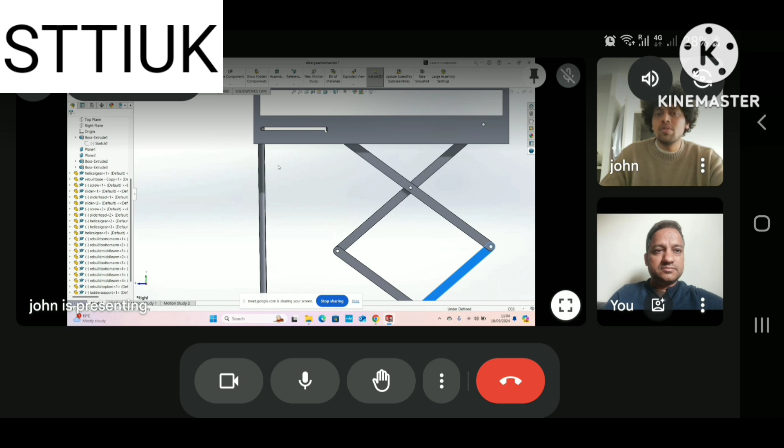Is it visible now? Yeah, your screen is visible now.

So this is what I have designed. A few changes I've made, Shivananda. Instead of a rack and pinion here, I have made a helical gear and lead screw arrangement. This is more stable.

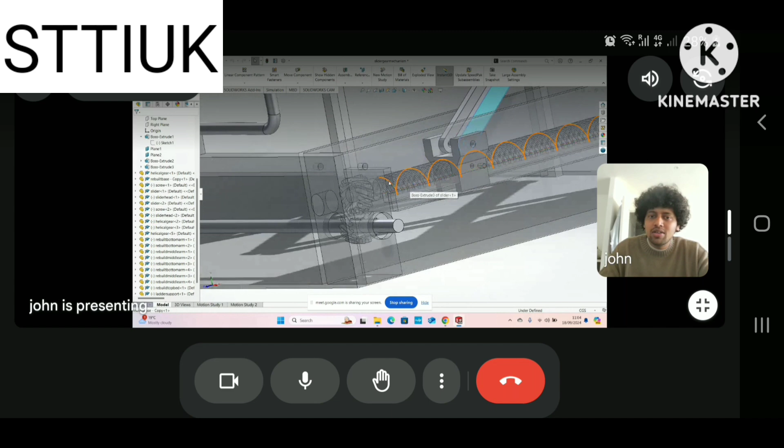Let me show you. With some kind of lever, you would be pushing it. At this end, I have left a space which is extruding outside. This can be used for connecting a lever here.

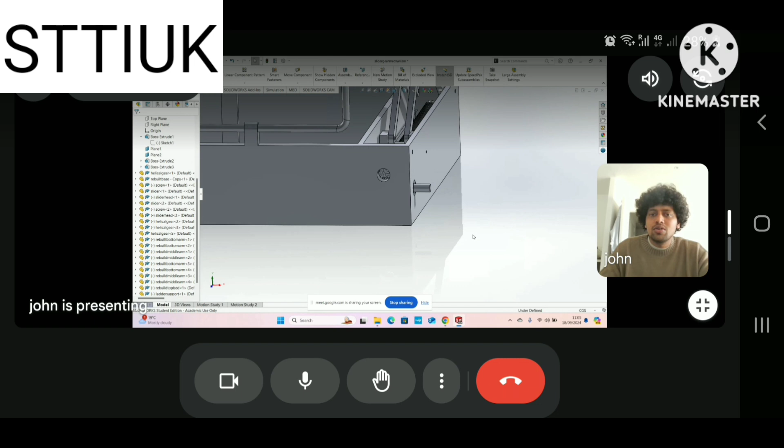This part, and inside here, a helical gear is placed vertical, parallel to this rod. And another helical gear is placed perpendicular to that, which drives the lead screw here.

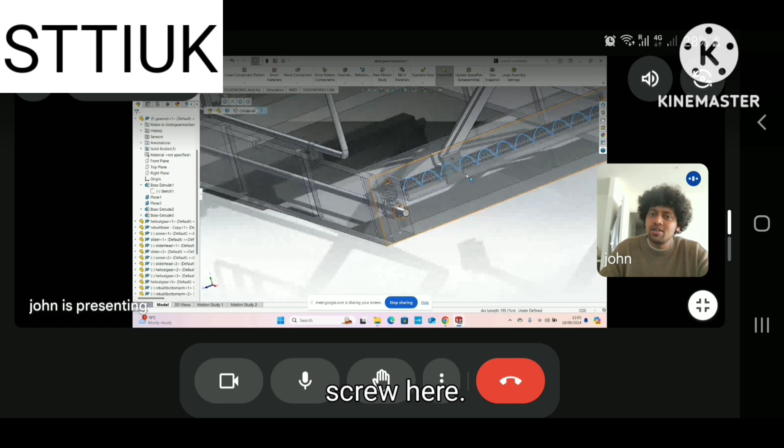It has a slider. When we rotate this, the slider actually moves from here to here. Maximum distance I've just calculated, so let's say the maximum distance is this.

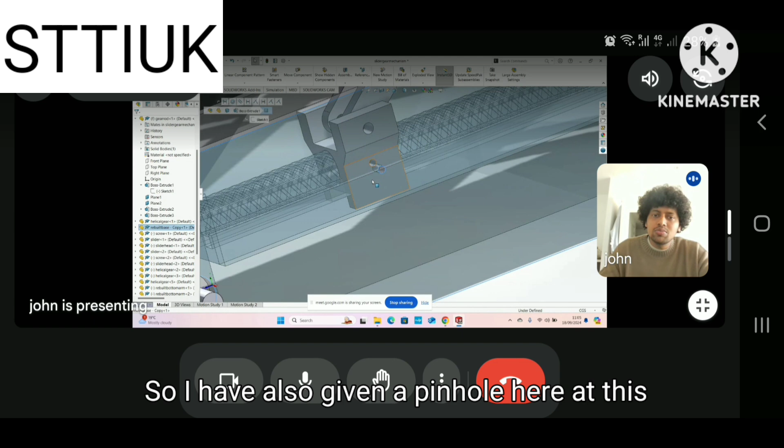I've also given a pinhole here, at this point as well as on the slider. It is not necessary since the lead screw itself will hold this, and if we turn, there is another mechanism which can hold it from turning back. But still, on the safety side, I have made another hole or a pin here.

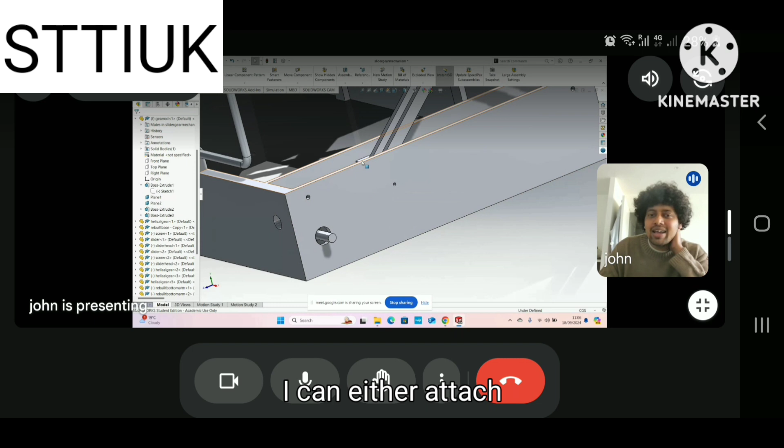We can either attach a chain or something, or plan for a mechanism where we just push in this pin, which is always attached, so that this pin goes into the slider hole here. This is one safety mechanism.

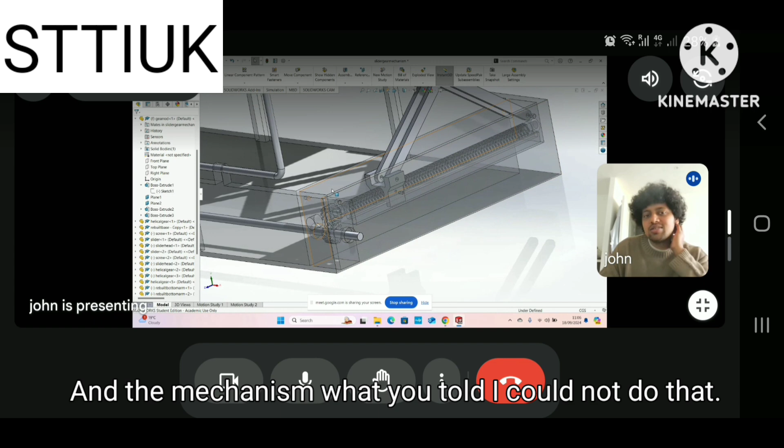And the mechanism you told me, I could not do that, so I thought of adding more. I just did a slot mechanism here, the normal slot mechanism where this slider comes and locks into this position the moment we lift it.

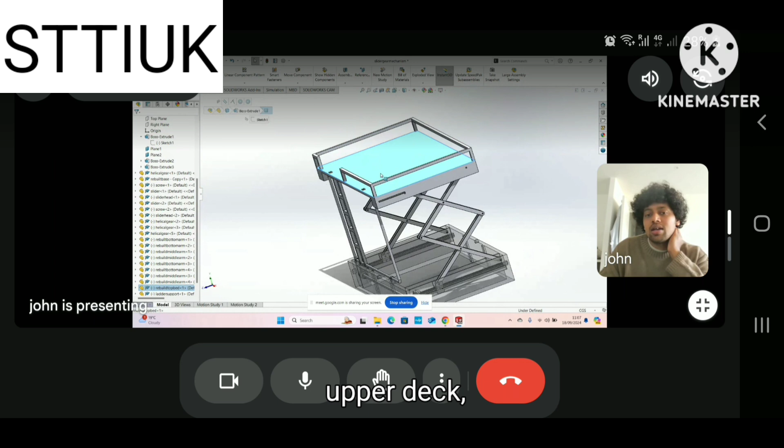So the moment someone is on the upper deck, it never goes down because this is locked here in the slot. This is one mechanism. You need to lift it up to make it slide, so we just have to lift a little and then rotate, that's it.

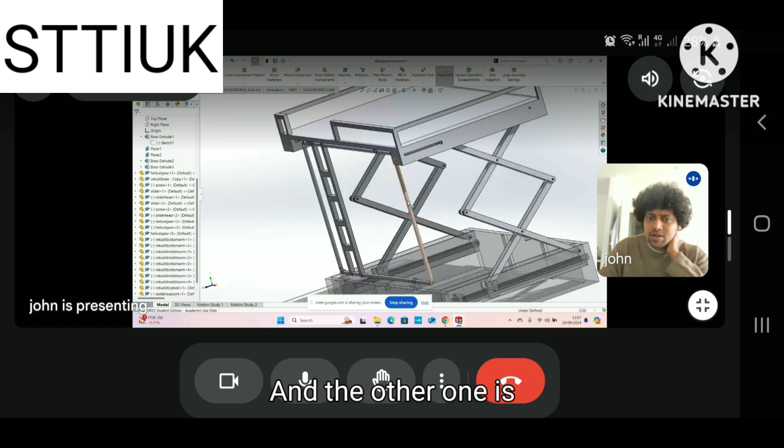Okay, and the other one is the ladder thing, which can be folded like this.

Yeah, can you hear me? Are you able to see? Yes, yes.

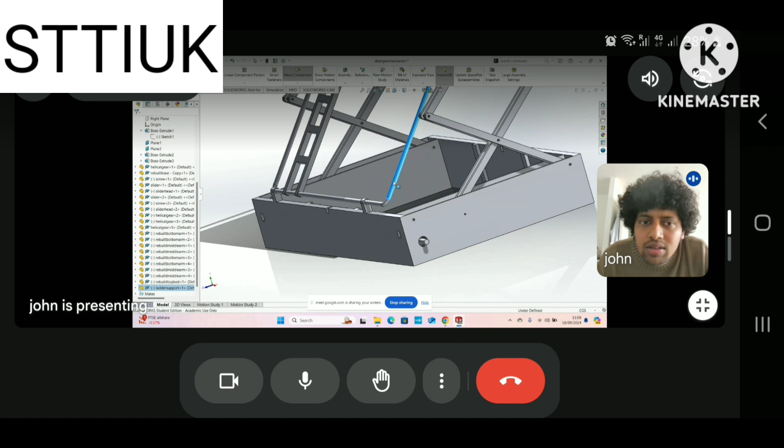So I've just given a normal... why have you made a frame? This is actually a single frame which will be attached to this point on the lower deck.

But do we need a frame like that? Only the ladder would be okay, hinged somewhere. I thought this would give more stability.

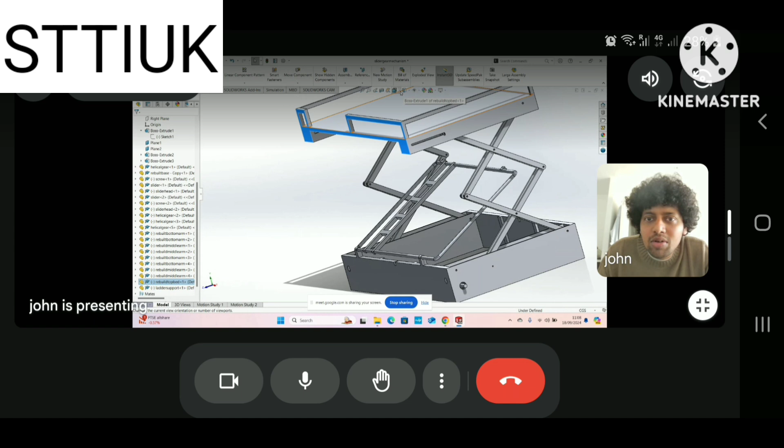In order to attach it here, let me show you. I made a slot here. This will actually move towards the left side. We just have to push it to the left side and lock it here. See, this is the distance.

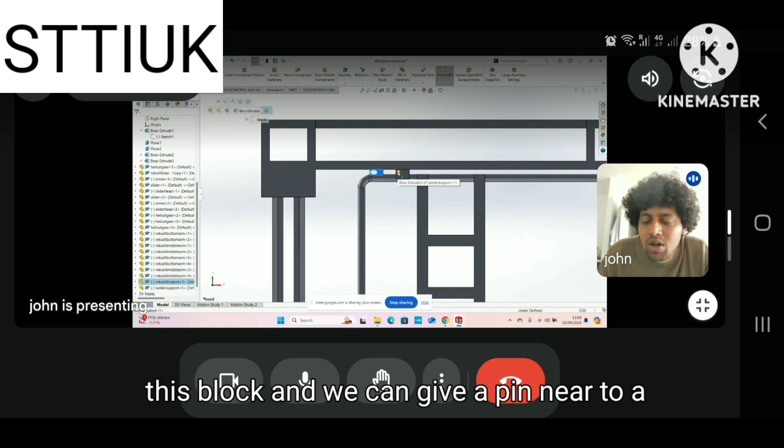Once we lift it up, we just push it towards this block, and we can give a pin here too, a pin or a screw kind of thing. We just have to push that, so it gets locked, on both sides.

No, this is good, but we need to reduce... not the weight, I mean. We need to make it a very simple mechanism. So you have made a frame like this.

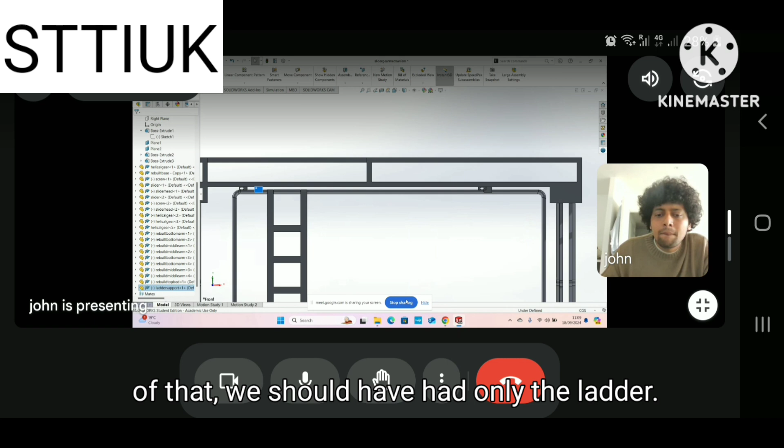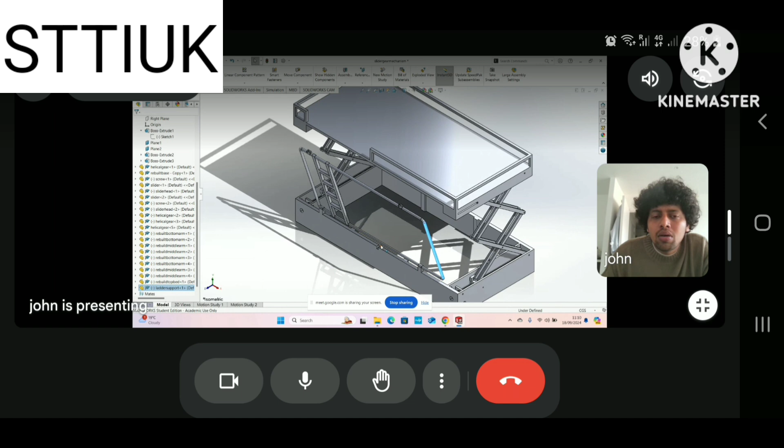Instead of that, we should have had only the ladder, in the horizontal position. Whenever we lift it, the ladder will come up and sit. We can add two ladders, on the other side and this side, so that would be a very rigid connection. But you have made it a little complex with this frame and sliding the ladder to lock into position.

All that will consume cost and material. The process cost will be more to manufacture. So a simple ladder would have sufficed in this case.

But how would we connect it? Let's say only this ladder, so how would we attach it here?

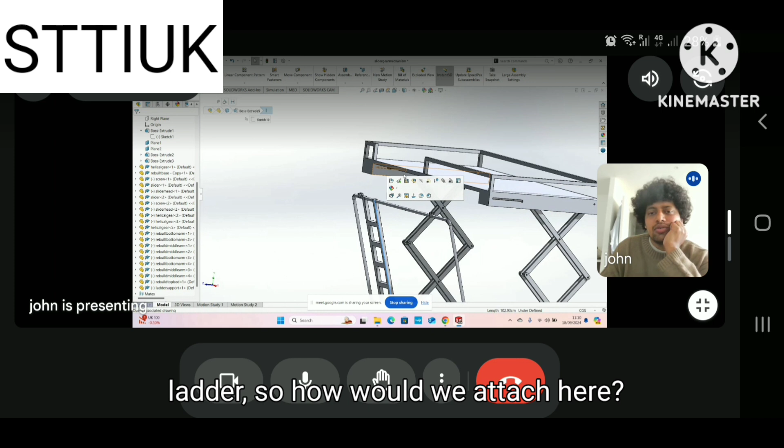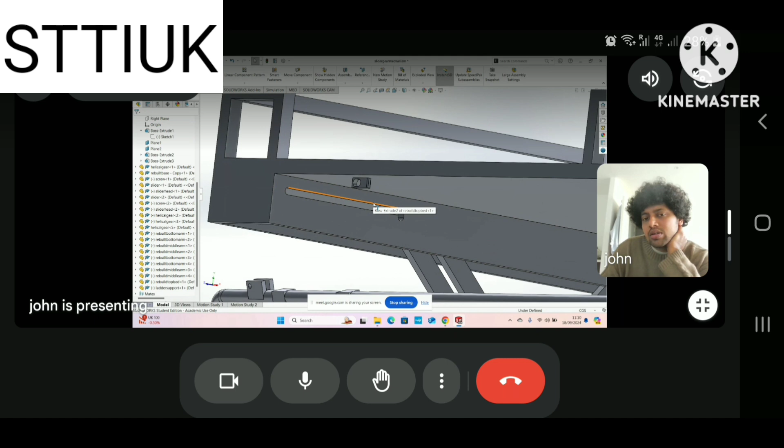I have no idea. So if there is only a ladder, the end of the ladder can be connected. Suppose on the top bed you have some hooks, so that can attach to the ladder. We can make some fixtures like that.

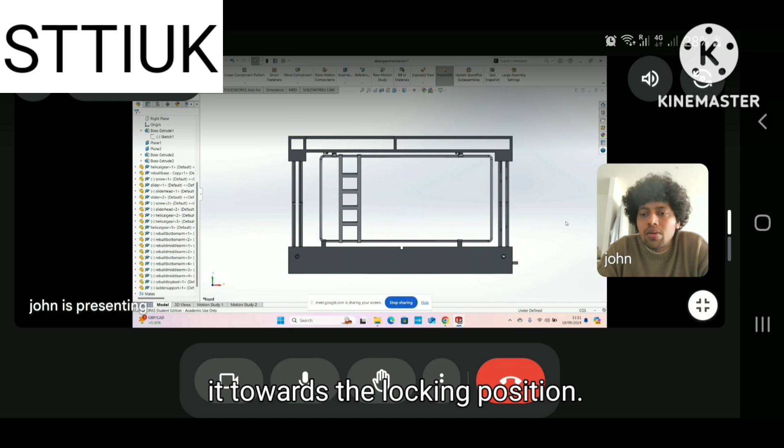We need to reduce material and make a very simple structure. Only a simple ladder would have been okay. So you are saying you have made this frame, and after lifting up you need to slide it towards the locking position. That would add material cost of making those frames and hinges, so it would make the cost go up.

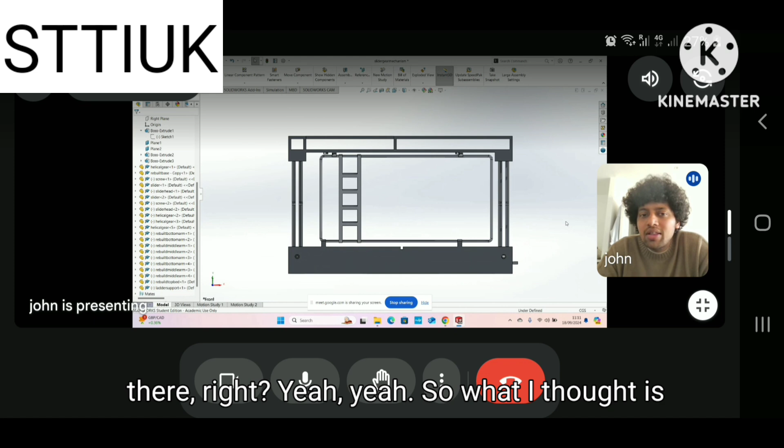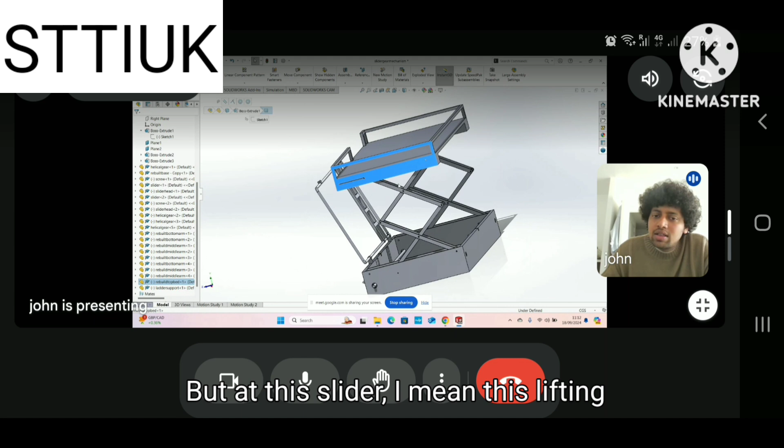Understood, but even if we put the ladder, we should actually make a hinge or a locking system there, right? Yeah. What I thought is if we have this complete frame, it will give us stability on both ends. Let's say on this side I put only one ladder, and you're saying we have to put another ladder on this side, right? Yeah, on the opposite side. But this lifting mechanism is towards this end.

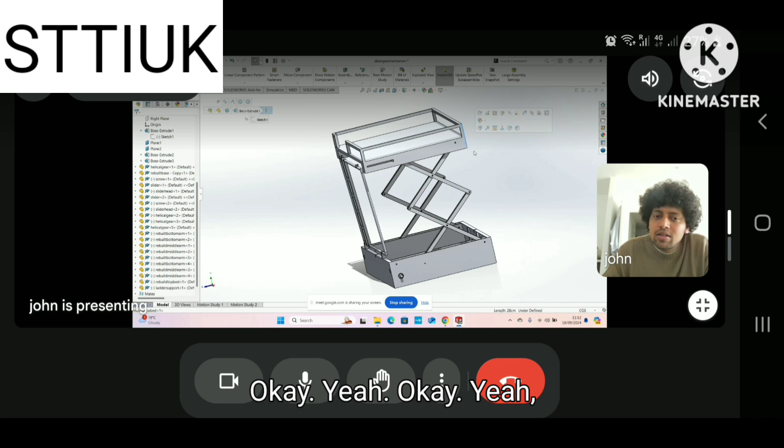So this will anyway support the other end completely. So this is moving towards this side, right? The reason I put the ladder on this side is because this side has little support compared to the other end. Okay, we can have the other ladder on the opposite side.

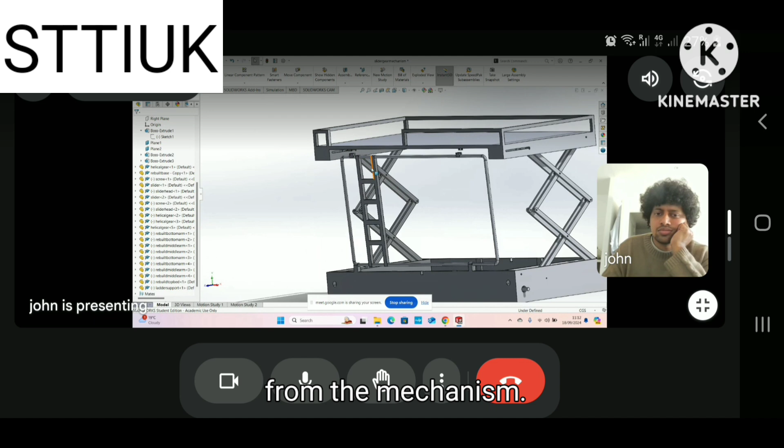We don't need a frame, just one ladder would probably be okay. So you have already provided one ladder on the other side for the overhang, more towards this side from the mechanism. Yeah, this would be okay. But generally speaking, we need lesser material and a very simple mechanism to reduce cost. That is the intention.

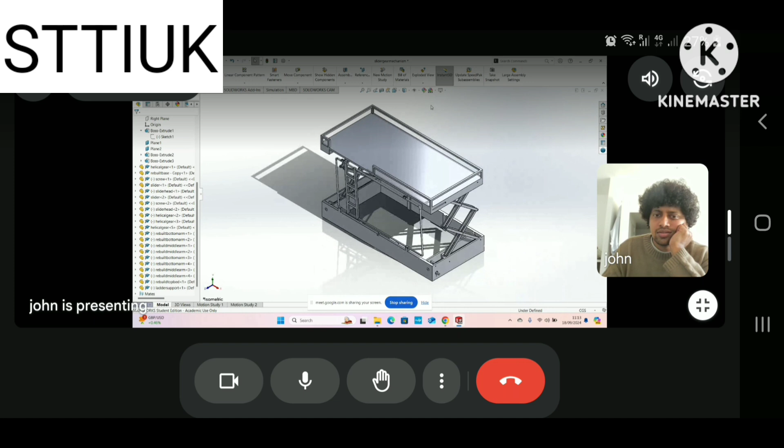But anyway, we already have this mechanism support. Do we need this much robust support, making a frame with the ladder? Do you think so? No need of this frame actually. But what I thought is since the ladder is only on this end, only at this point we have support, right?

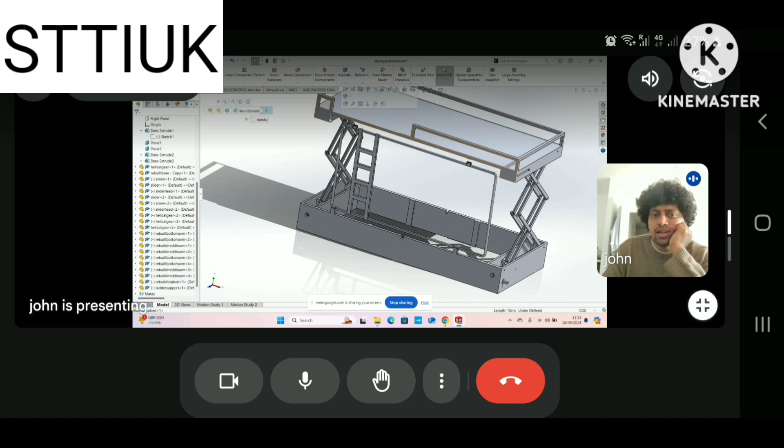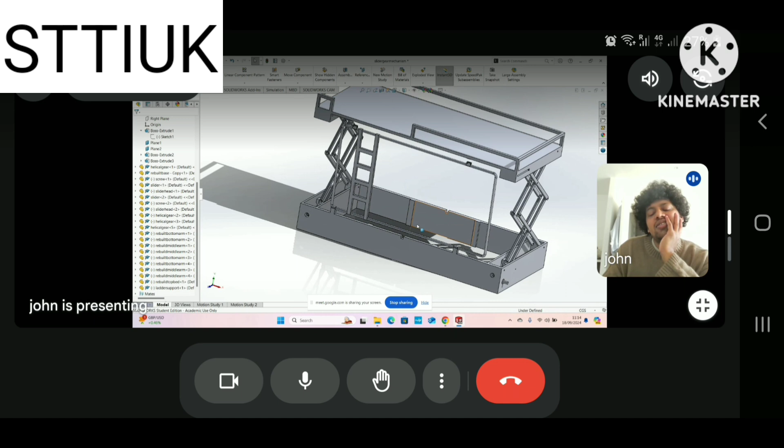On this side. Yeah, or else we need space to ingress, right? Even if you put the ladder in the middle of the bed, would that be okay? There would be good space to move. That would be okay, but for the lower deck person it would be difficult to get in and get out. It may not be that difficult, but there is some difficulty to ingress into the bed.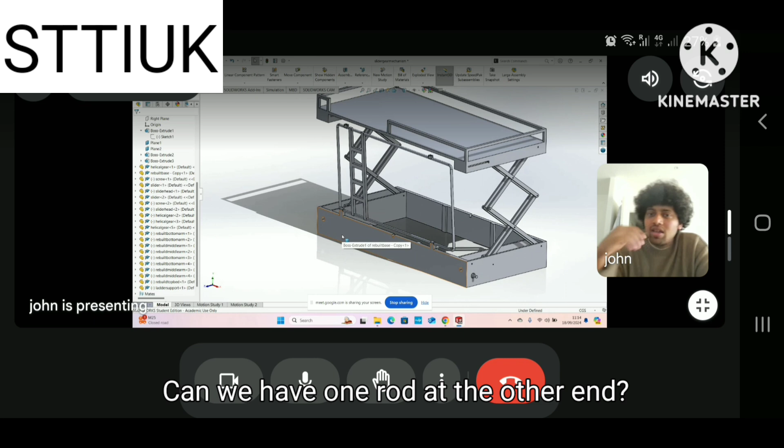So how can we make it simple, or can we have one rod at the other end? One side ladder, one side one rod would be okay. Making a big frame would cost more. So suppose you have a ladder at one end and one supporting rod at the other end, that would be okay, right? But we have to do it twice, right?

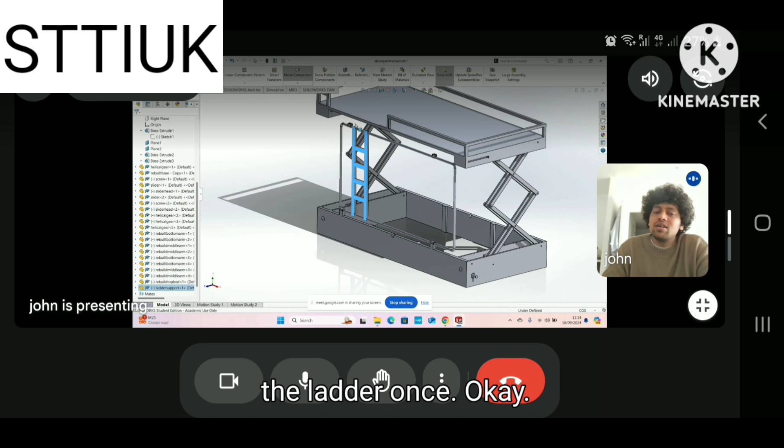So first we have to lift and fix the ladder once, then we have to again lift the rod - let's say this is the rod, the blue color. While fixing it, we have to move this again, so while moving it, this might go down. That is the problem.

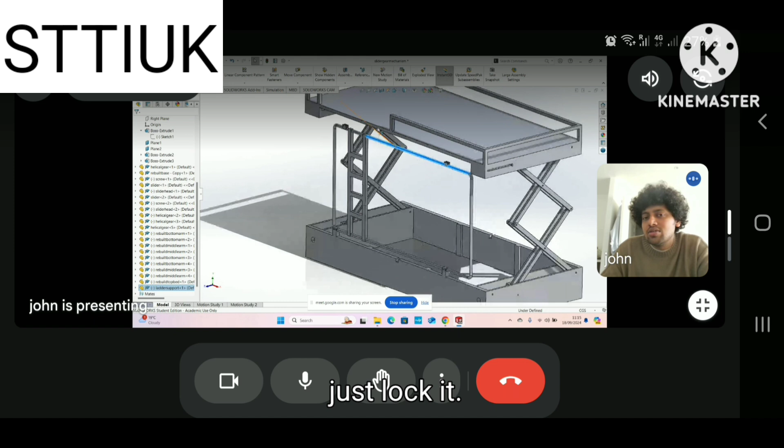So when it is a single frame, we can directly lift the whole thing and just lock it. But we have this lever mechanism at the bottom - when you rotate it, it would easily go up, and with the pin you can stop it at a certain position and lock the rod as well as the ladder in place, and you can bring it down to fit it in position.

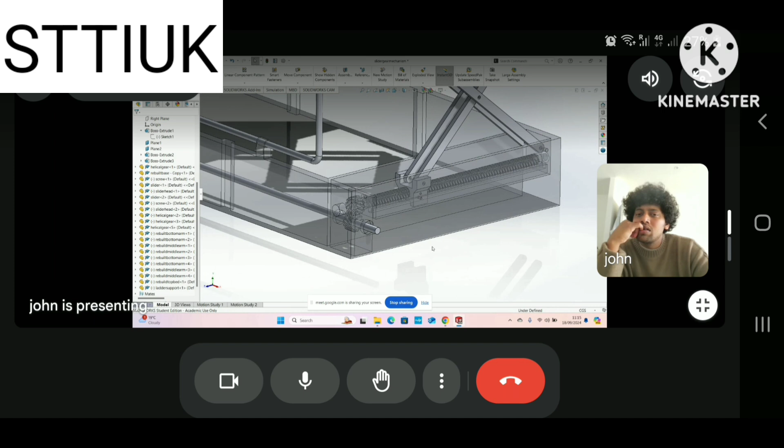Lock the ladder too? I didn't understand. When you rotate this lever, as it goes up, you lock it at some position, then you fix the ladder as well as the rod at the other end, and that would be okay.

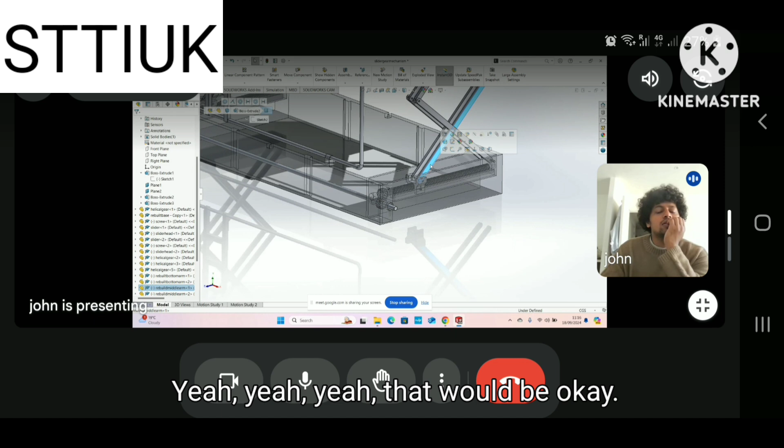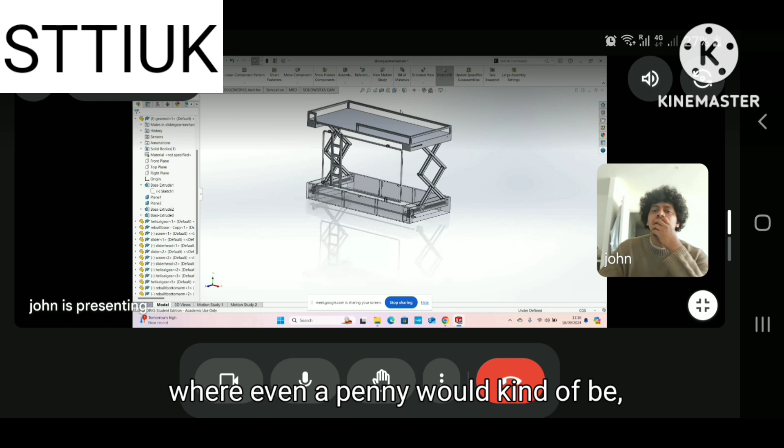Let's see where we can reduce the material. We need to reduce material, because even a screw adds to the process cost and manufacturing cost. In a very competitive world, reducing even a penny would be a good initiative in designing. We need to look at the raw material, the process cost, maintaining standards, everything. It would add cost.

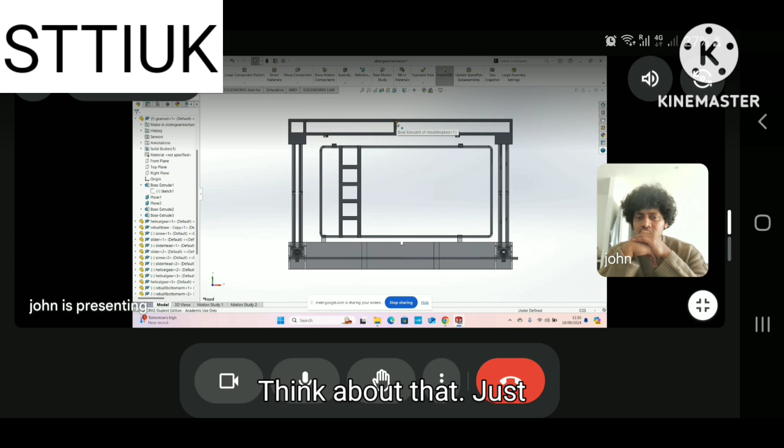Think about that. Just one ladder at the other end, and we can push the ladder a bit away from the center of the bed, a little more. Now it is at around 25% of that longitudinal distance. We can push it further towards the mechanism.

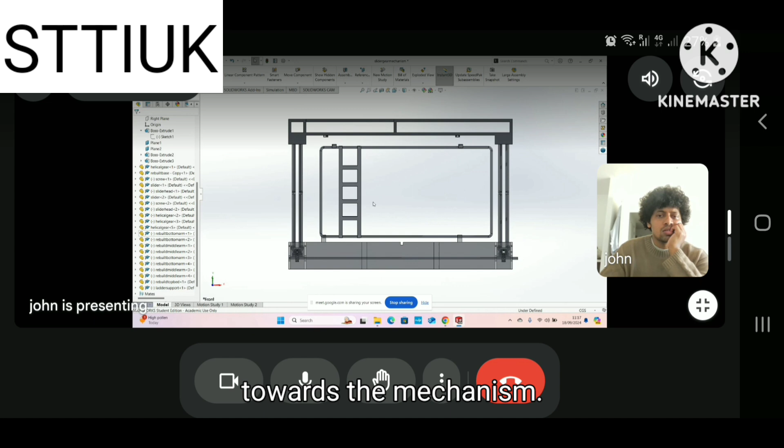This will actually stay towards the mechanism itself. You are saying you can come towards this side, right? Okay, you can push it, and this is good actually. What you have made is a frame, but it is adding cost.

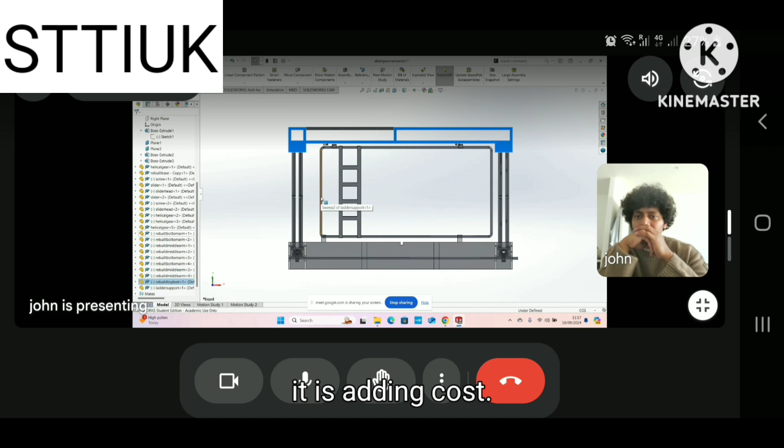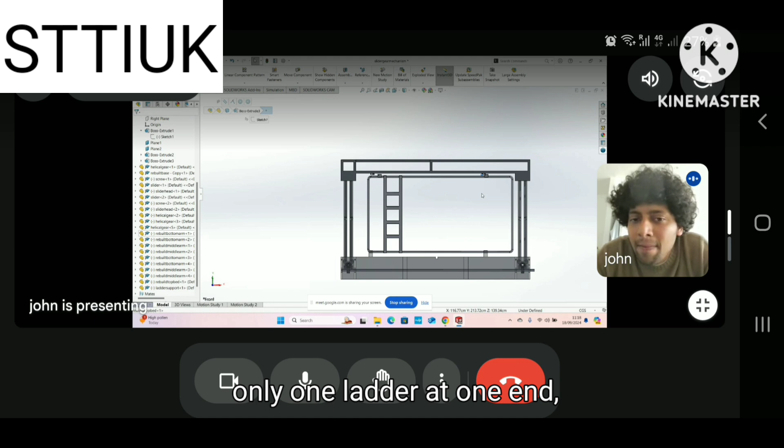Got it. The thing is, the frame I made will have support at this point as well as this point, so it will have balance at the top. Or else if we just give a ladder support here at this point, we don't have any support at this point, right? That's why I mentioned only one ladder at one end, a rod at another end.

That would be okay, and we can have the same thing on the other side as well. This side too, right? Yeah. Other side also we can have the same kind of stuff.

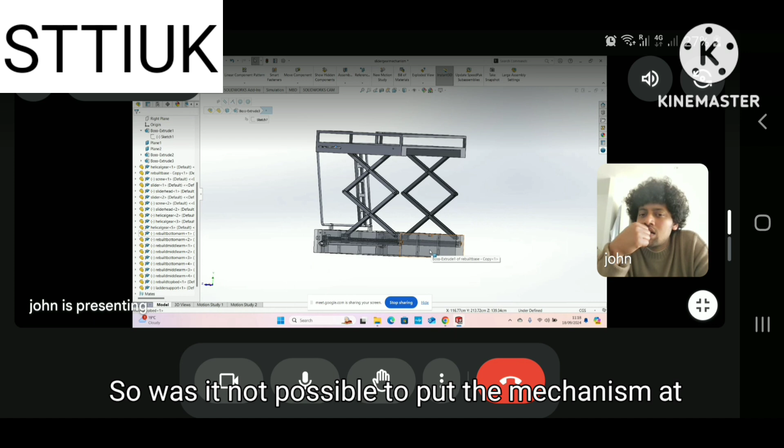So was it not possible to put the mechanism at the center? It's not possible because we need to slide it, right? Yeah, we need to slide.

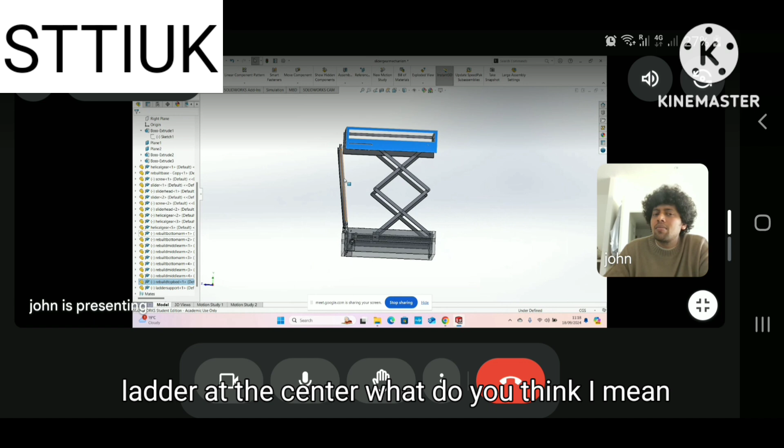Okay, I mean we can put the other side ladder at the center. What do you think? I mean, we can have this frame what you have designed, and on the other side we put one more ladder in the center of the bed.

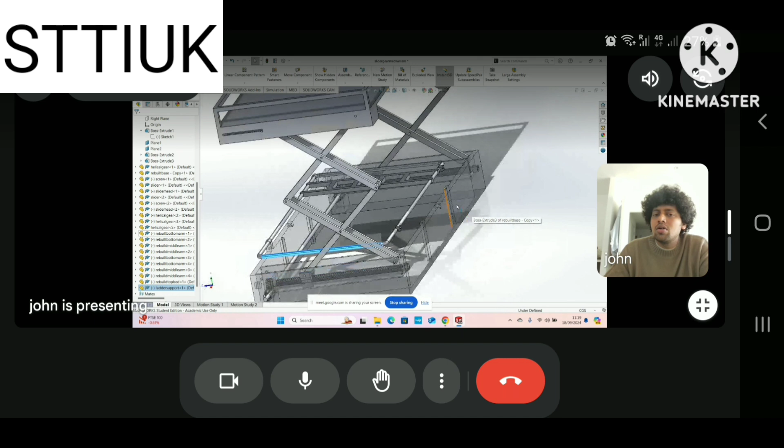That can be done, but again, like the folding thing, it should be folded, I mean it should be parallel to the bed like this. First you lift the frame, then you lift the other side ladder.

But again, just a suggestion - instead of making two ladders, one side ladder is more than enough, right? So again, as you said, we can reduce the material here.

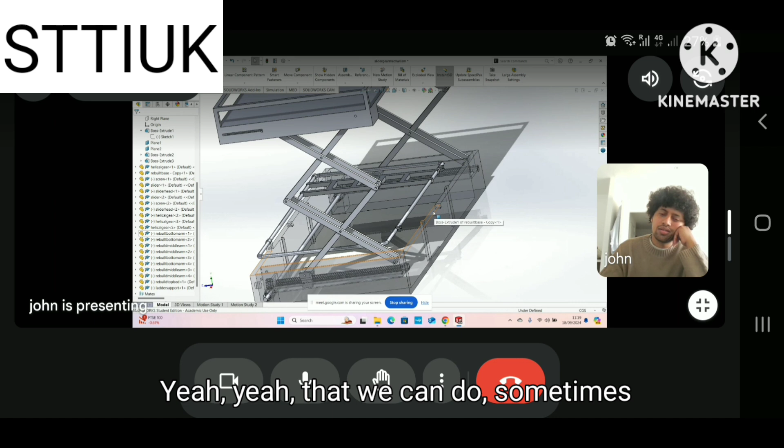That we can do, but sometimes how does the customer put the bed? We don't know which side is the wall. The bed will be placed near the wall, right? Anywhere in the room. So on which side the wall will be there, we don't know.

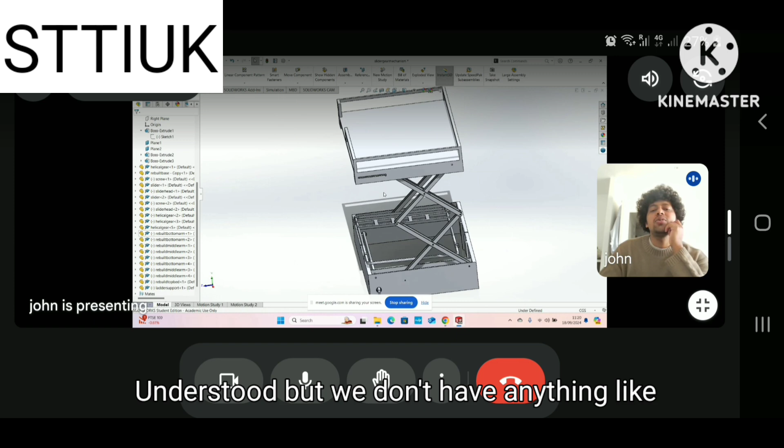Understood, but we don't have anything like front or back, right? Yeah, this is front, this is back - there's nothing like that. This can be a front side, or even this can be a front side. The symmetry - if you maintain symmetry, it will add to convenience. So however they place it, there would be no issues, I think.

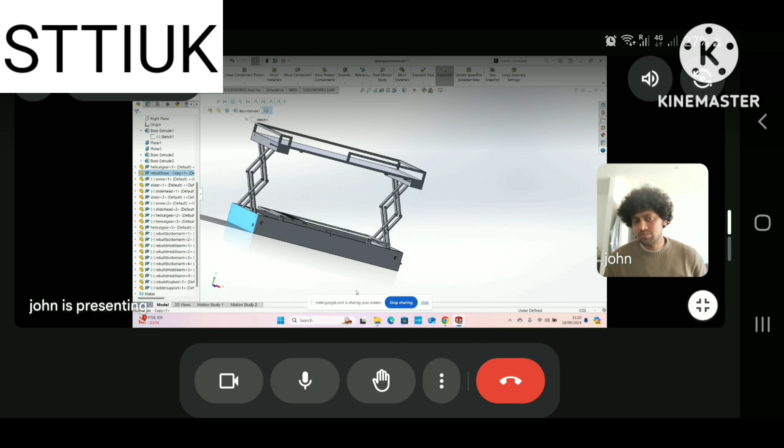Okay, I'll try to add that. Yeah, both sides - if you add a ladder on both sides, that will be very good. So people don't have to think about how to place the bed, whether this side is the head or this side is the head. They don't have to think about it too much.

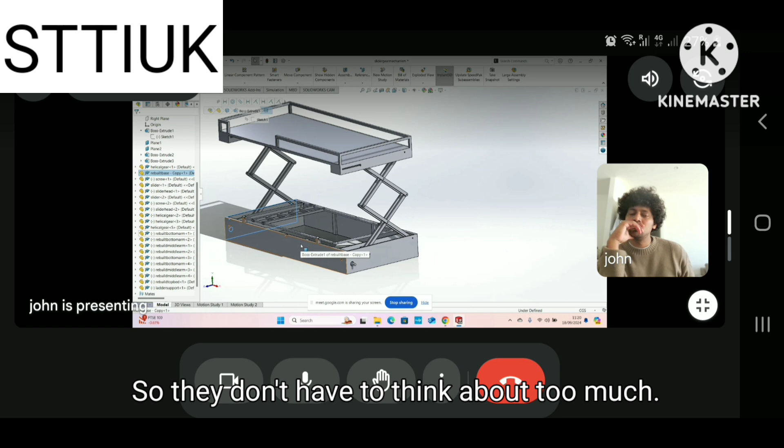Got it, but again this will consume a little more space. So right now, while closing this, let's see - exactly, while closing this is a single bed now. So everything is inside this, the space what I've made, everything inside this.

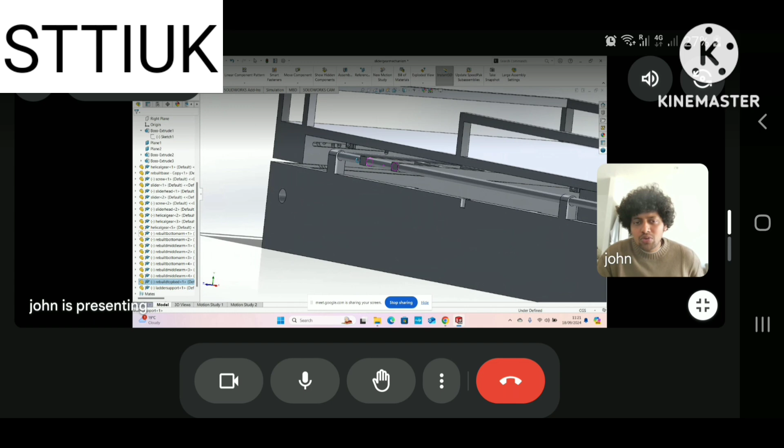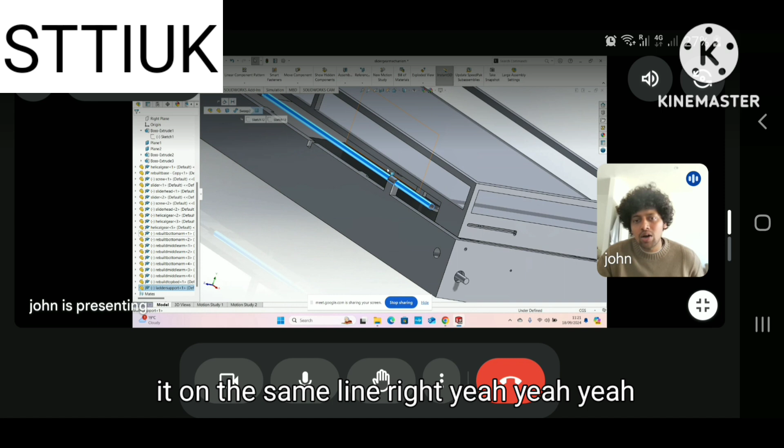So when we add one more thing from this end, what happens? We have to increase the size of this so that we can fold it above this thing - we can't fold it on the same line, right? So I mean, we can make the lower bed a little more lower, so that the height would not increase too much. And you have made, on the top of the bed, rails.

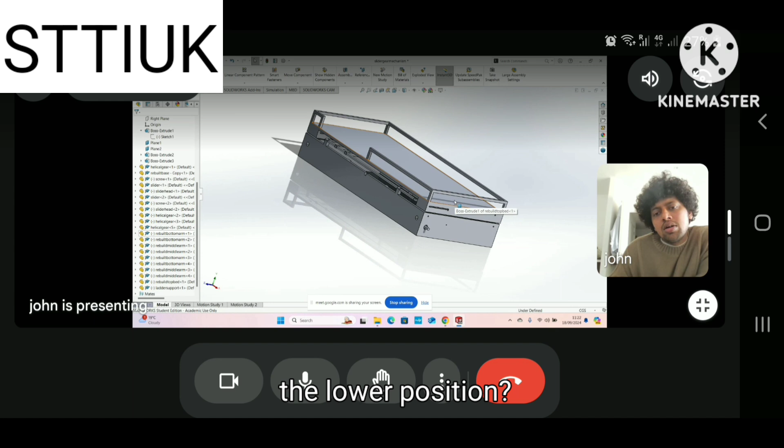So those rails, is it foldable when it is in the lower position? No, it is not foldable. I mean, we can make it foldable, but anyway, when it is used as a single bed, this support is needed, right? Like in order to put the bed.

So this is not that big. This is just what I made was like 12 centimeter height. And normal bed itself is like 10 centimeter.

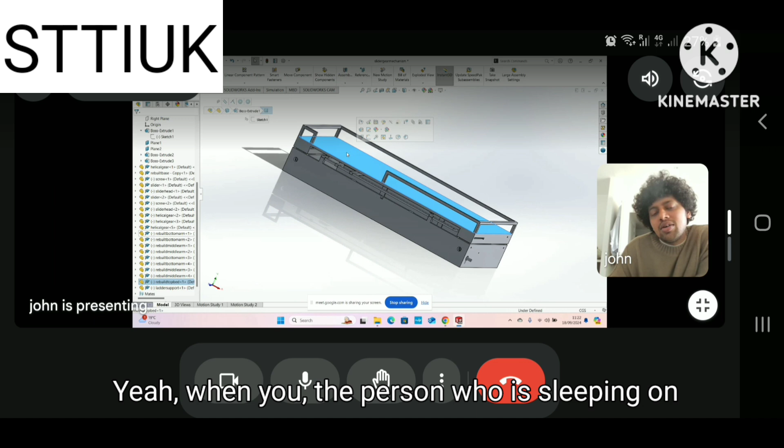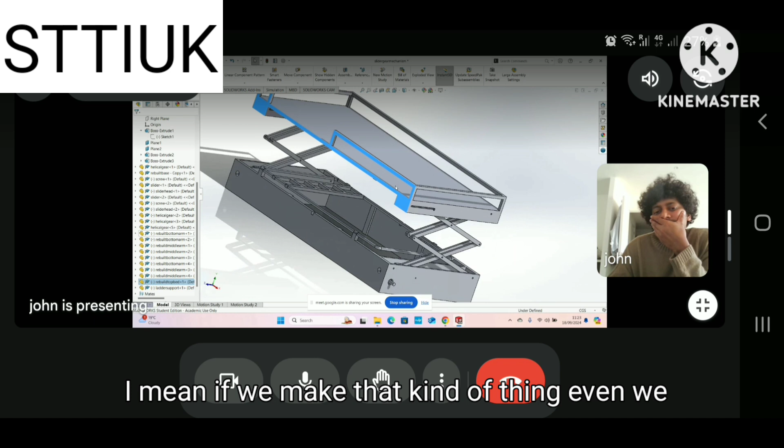When the person who is sleeping on the top, they have to have some safety while in sleep, if they fall down. So we need to have one foldable thing which goes up. If we make that kind of thing, we can fold it when it is in the lower position, and we can unfold it when it goes to the top.

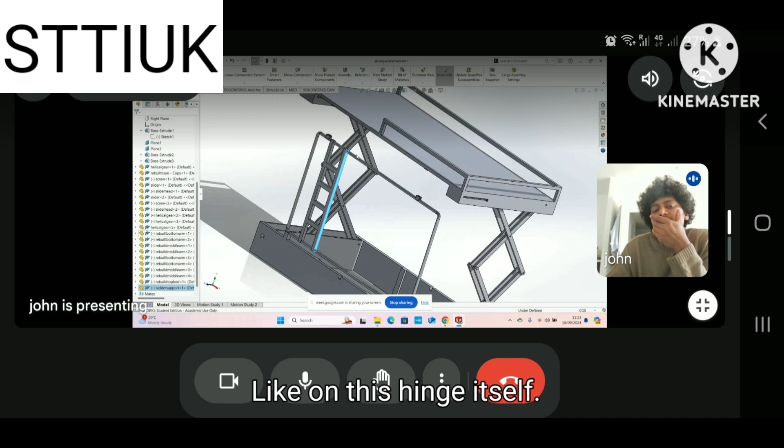Yeah, that can be added here itself, Shivananda, like in case. But do we need it on both ends? Like on this hinge itself, similar mechanism, we can add a thing which can be folded down like this. And when we attach this to here, at this point, we can lift it up and lock it here.

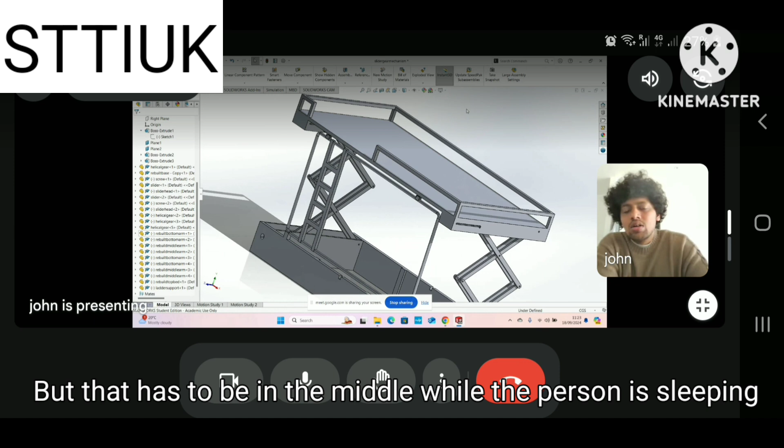Think about that, how we can have another mechanism, but that has to be in the middle while the person is sleeping. At least about 50% of the length of the cot, it has to cover. Got it, so that will be very safe. People will not fall down in any occasion.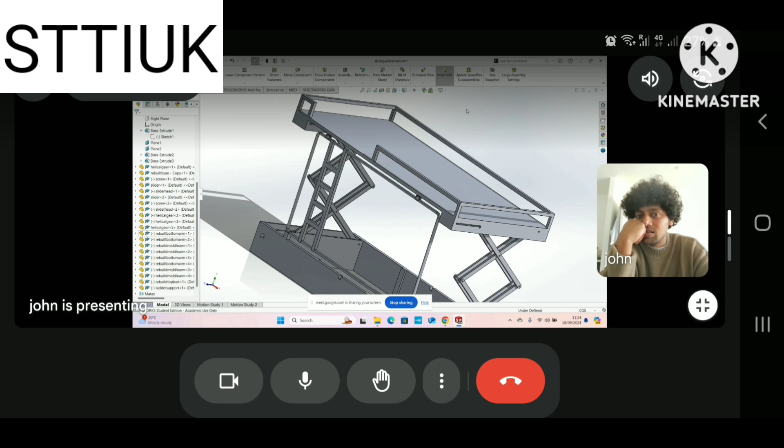Yeah, that can be done, Shivananda. I mean, think about in this perspective where we can reduce the material and the manufacturing process cost. Instead of a mechanism, we can just increase the height of this itself, right?

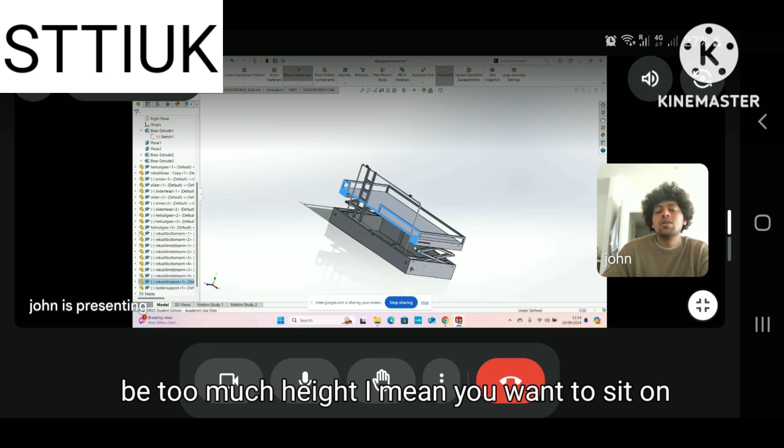But when it is in the lower position, it will be too much height. I mean, even to sit on the bed, it will be inconvenient, right, if it is fixed. Yeah, that's true, that is the only problem.

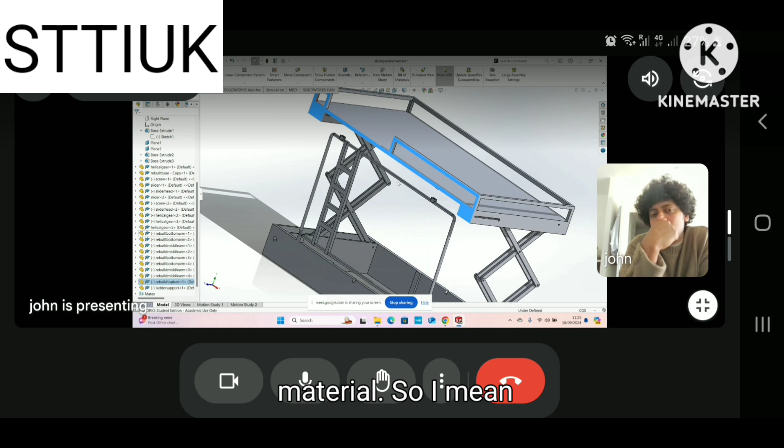Okay, we have to attach on this rail itself then. I mean, this frame itself, while we are making it very robust, we add a lot of material. So before modeling itself, we'll have to think about that, otherwise there will be a lot of iterations after receiving the feedback.

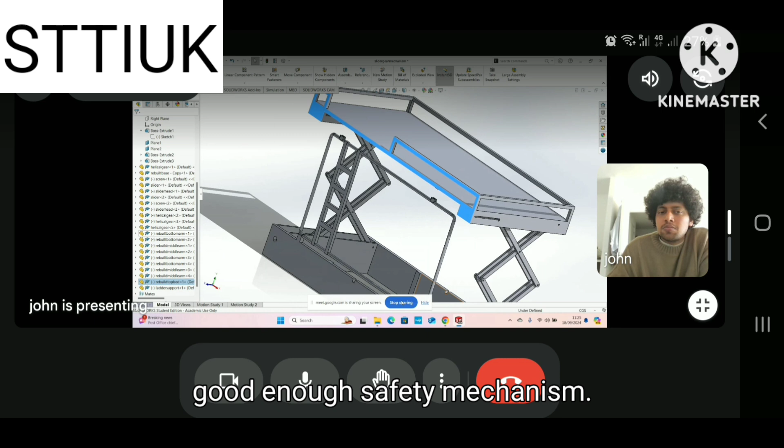Yeah, I think this is a good enough safety mechanism. I was thinking one more safety mechanism, maybe that is kind of advanced. When things are connected to each other, it will make a sound or something, a beep sound, so that it is safe to go ahead to the top bed.

Something like that. So when things are connected, when the ladder goes up and connected to the top bed, and also this pin at the lower end you put for the mechanism to stop it, we can connect them to some system where if all the connections are in place for the safety, you will get a beep sound so that your bed is safe to go to the top of the bed. So we can have that.

So if some mischievous thing, if someone wants to remove a pin or something, so when the pin is removed from the safety loop, it will start beeping.

Okay, yeah, that's a good idea. So if one safety out of, suppose we have four safety systems in place, and they are all in a loop, when they are connected to each other, it will make a sound, beep beep sound three times, and it is safe to ride on. If one thing is removed from the safety loop, it will start beeping.

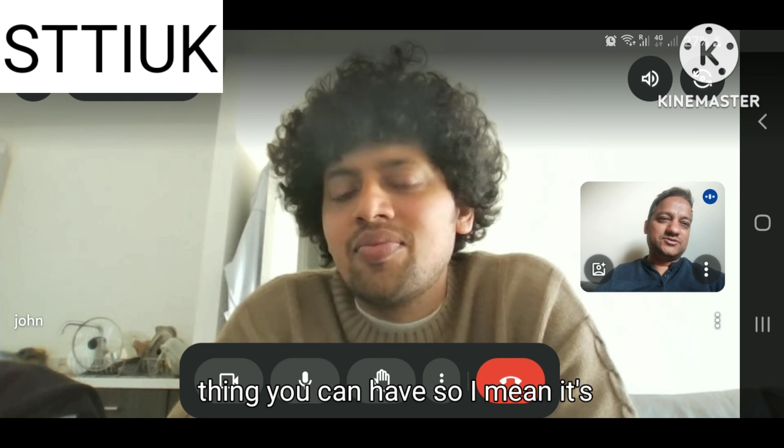So someone sleeping under the bed, the lower bed, they will be alarmed. So that thing we can have. So it's kind of a foolproof system we can make. There would be no drawbacks in terms of safety. I think this will be an additional safety feature.

I'll check about that. I don't know exactly what sensors we'd use. I too don't have any idea, but I had this thought.

When you connect Bluetooth earphones, one is put in, then another, and you get a beep sound confirming both are connected to your ear. The same kind of stuff we can have here.

Maybe an electrical system or a small battery operated Wi-Fi kind of stuff. This is kind of sci-fi what I'm saying, but I don't think it's a very difficult task given the advanced technology we already have, like IoT.

We have bulbs. I have a bulb at home which we can control through an app. That's an IoT bulb - we can make white light or different colors of light, controlled through the app.

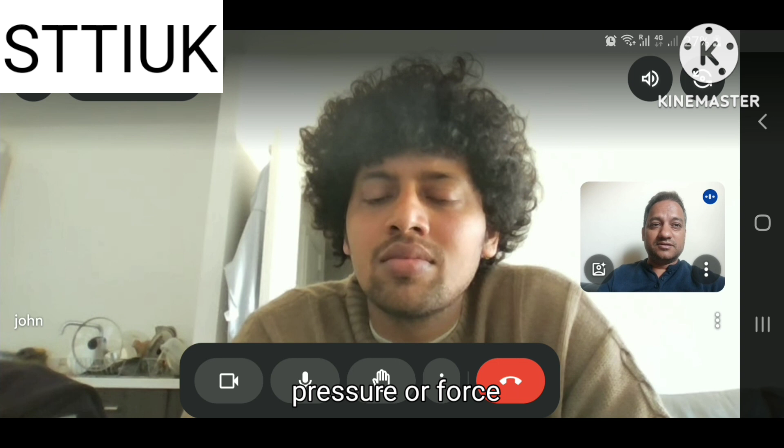But we can do stress analysis on the brackets - yeah, that we can do. That's kind of something you might know in SolidWorks - you apply uniform load on the top bed.

We can apply pressure or force on the top bed, and extract stresses in the brackets or the ladder which you are supporting, and also in the mechanism which you are working through. That can be done. In the later part we can do the finite element model.

We can check the stresses and failures, identify if it's going beyond the yield point, or failing due to plastic failure or something. I just wanted to understand when it is loaded, like when children start jumping on the bed.

The impact loads. So what happens on the slider and the lead screw? It's very thin - the screw patterns are there, so there will be a lot of pressure on that, as well as on the helical gear surface. So I wanted to check how it will affect things.

Yes, for long term, with a very good factor of safety, we can design it. So that was a double-decker bed which John designed. I used to help him with the design, what to consider, what not to consider, and there are key points where we need to reduce cost and material, and it has to be a simple design. We discussed what safety features we need to embed into the design, so safety is the paramount thing we need to consider.